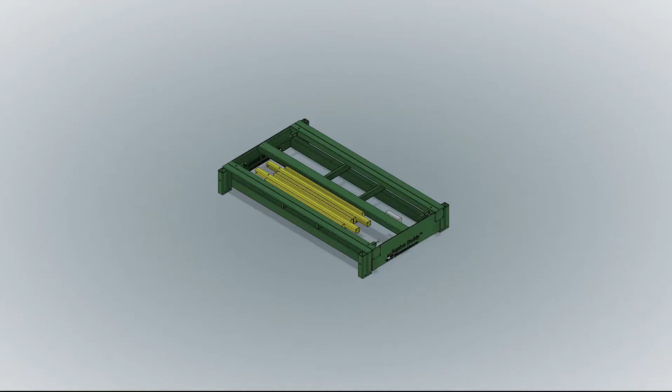Now let's get started. First, find and remove the hardware kit supplied with your unit. This is usually shrink wrapped to the center support of the unit and wrapped in cardboard. After you locate and remove the hardware, cut off all the strapping holding the other parts on. Open the hardware package and verify that you have everything you need.

Click here for a hardware list, but mainly make sure you have 6 4-inch bolts and 2 7-inch bolts, and enough nyloc nuts for each one.

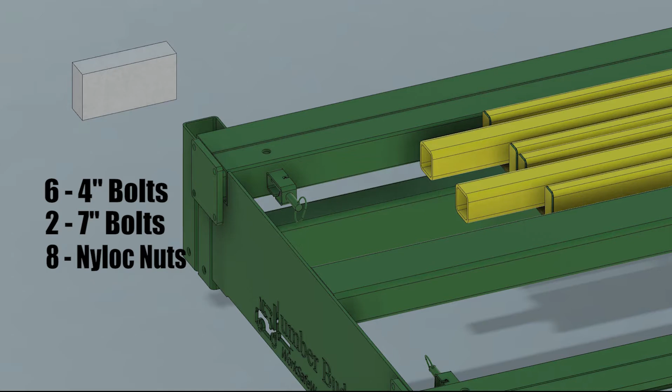If you have 4 5-inch bolts as well, those are for the wing extensions, and I'll tell you about those in just a minute. This part will be much easier if you raise the Lumber Buddy base to a comfortable working height using a forklift.

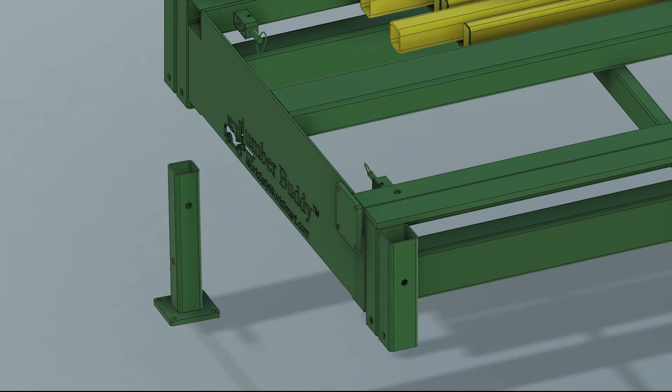Now, locate the legs for the unit. They are probably in the wing tube pockets and secured with a spring pin. Remove one leg from the wing extension tube by twisting and pulling the pin, locking it open. Once it is removed from the tube, place it in the pocket as shown, making sure that you cannot see any of the bolt holes outside of the tube.

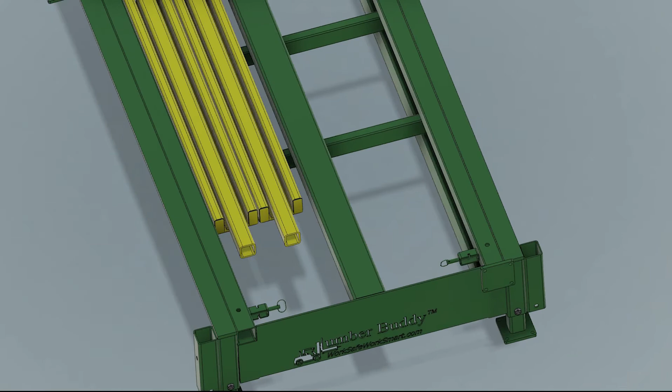Be careful here, the feet can go into 2 sets of pockets, but they go in the ones with the top of the pocket covered. This is a safety feature, and it is important to get the legs in the correct pocket. Once you have verified the legs are in the correct pocket and at the correct height, insert the short 4-inch bolt into the bottom holes as demonstrated here and finish with a lock nut.

Now it's time to install the uprights. The uprights should have been strapped onto the base until you cut them free earlier. The uprights are square tubing painted safety yellow and have 2 holes at one end and a series of stickers at the top.

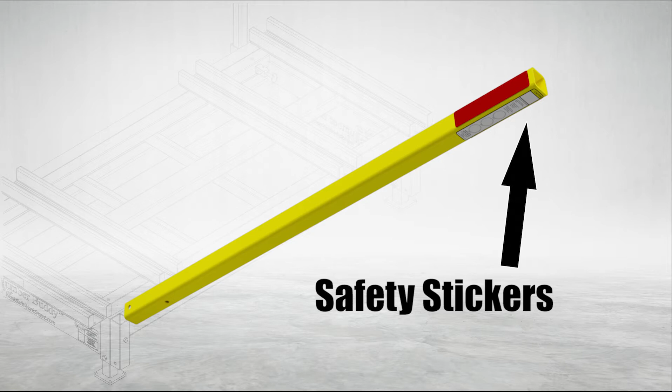It is important to get these inserted correctly. The red safety stickers should face the ends of the unit, and the safety notification about using the fork pockets should face away from the unit. I will add here that the information on this decal is very important. Always use the fork pockets and always keep the Lumber Buddy as close to the ground as safely possible.

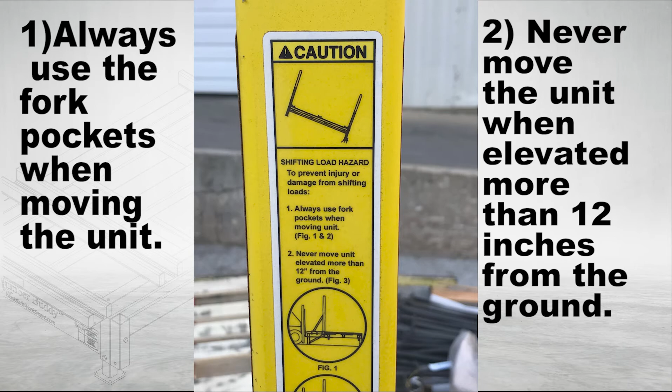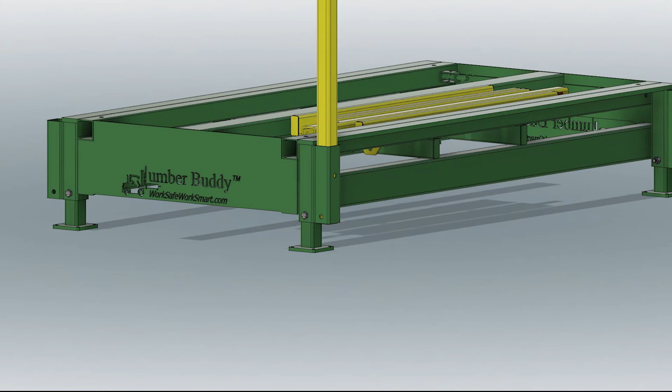Now, place the upright in the desired pocket. The upright pockets on this unit are directly behind the leg pockets at each corner. Then, line up the bottom holes and insert another short bolt and secure with a lock nut.

Now, insert the long 7-inch bolt into the top hole. You may have to wiggle the upright to complete this step. Repeat this step one more time for the other upright. Note here that you want both uprights on the same side of the unit.

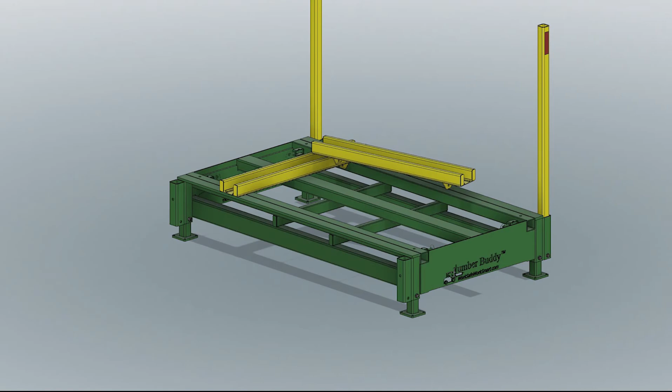Now you should have some banding channels left. If you have only 2 banding channels, they both go on the base of the unit as shown here. These channels are designed to slide along the base so that you can move them to fit whatever bundle size you're working on. Once those are placed, you are all ready to begin using the Lumber Buddy.

Now, if you have some banding channels and bolts left, those are for the wing extensions. Let's get those put together real quick. To get started with the wing extensions, just grab a wing tube off the base and place it in the tubes you removed the feet from. Put them all the way in and secure with the lock pins.

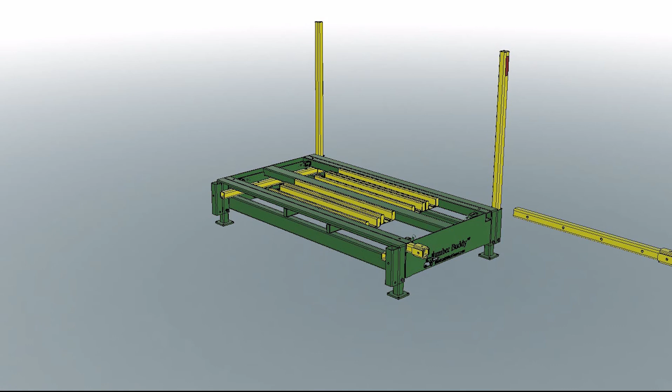Some people find it easier to pull the extension tubes out one click and lock them in the first extended hole, but it isn't necessary. Then do the same thing for the tube on the other end, making sure they are even.

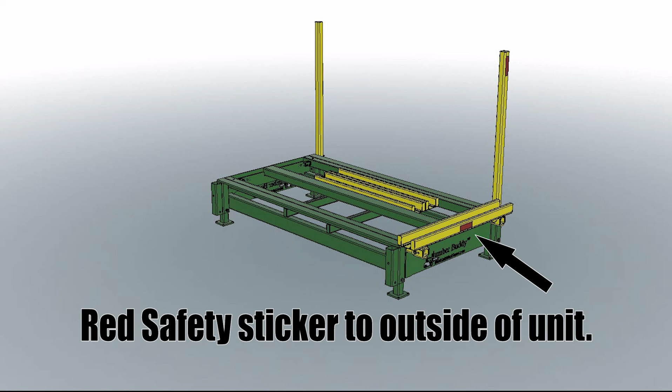Next, place a banding channel in the ends of the tubes as shown here, making sure that the red sticker is facing the outside of the unit. Then secure them with bolts and lock nuts on both ends. Repeat this process for the other side, paying close attention to have the other banding channel with the red sticker pointing to the outside of the unit.